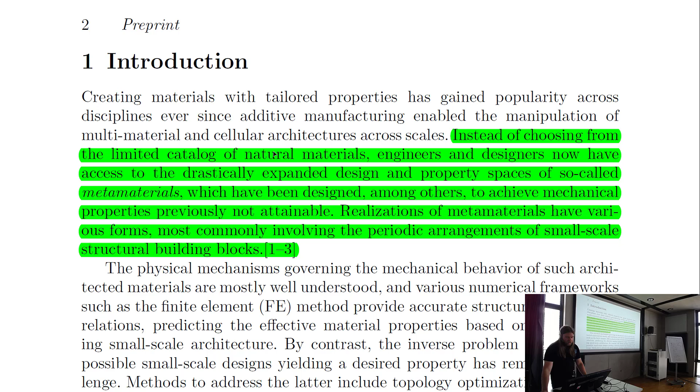So that's just some introduction to the metamaterials that Slava already kindly did. Let's go down and have a look at our data set, because from a machine learning perspective, the three important parts are dataset, model, and of course, evaluation.

So, here's what they did to generate the data set: they sampled some probability distribution, a so-called two-dimensional Gaussian random field. It's not important what that is—the important part is it gives us quite nice distributions in two dimensions that are connected and very well fit together.

So we don't need to worry about a piece of material that's maybe, if we have some peak here, then it wouldn't be connected and that would just fall out or break off. So then we take this field and do just some binary thresholding—you can see how this evolves. And then that's where our material is deposited.

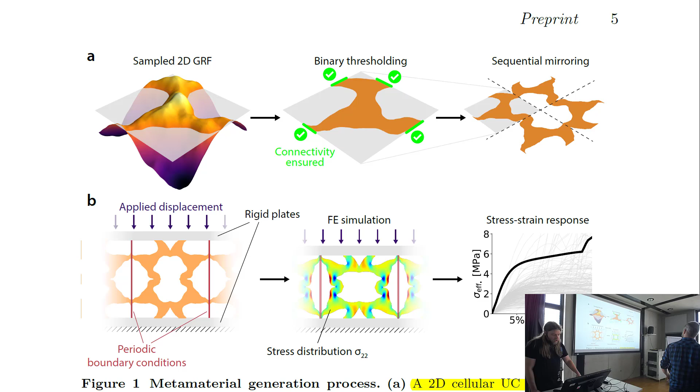These are connected to each of the sides, and from that we can actually do some mirroring to get some very nice pattern here. And that's how they generated the samples for the data set.

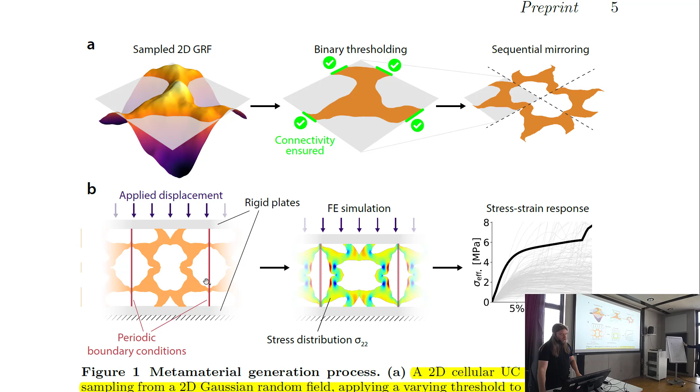And then they took them and just applied compression here, not on one element but on an infinite row of elements by supposing this periodic boundary condition, which means these repeat periodically infinitely. And for that, they did finite element simulations, and from that they got these nice stress-strain responses from which they got the 11 points.

And also these are the images I talked about—red means high stress, blue means low stress, and yellow is in between. Do you understand how it was generated? Technically speaking, you can choose whatever method of generation you want, really, but in this case, this particular trick—doing some three-dimensional thing and cutting it—due to properties of the distribution, you automatically have this periodicity, meaning you can stitch some of the elements together.

You can, for instance, stitch this one to this one and this one to this one. So it's kind of cool to have. And they copy it 4 times for one specific reason.

In mechanics, if you have this nice periodicity, it's much easier to define Young's modulus as one parameter. Because if you attended the class of micromechanics, you probably know that if you have arbitrary material, it can be anisotropic, so you need multiple parameters, like a stiffness tensor, to define properties in all directions. In this case, when you do the trick, you see it's symmetrical, so it cannot do shearing deformation anymore. This one cannot move here, and this one cannot move there, because everything is symmetrical. So this is just a purely mechanical trick.

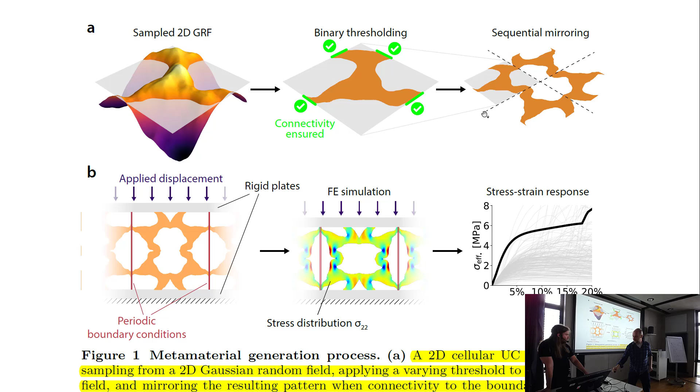Okay, go ahead. Yes. Thanks. Okay, yeah.

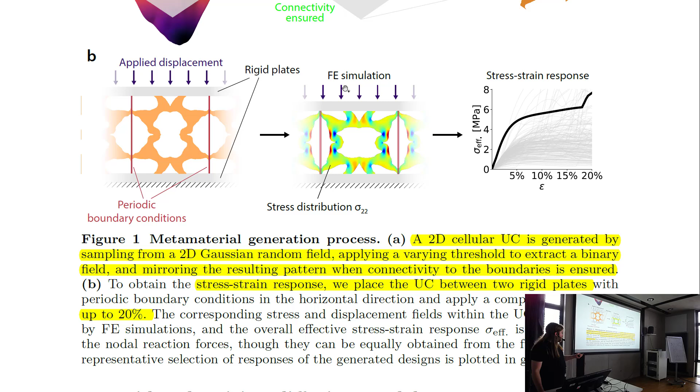Maximum strain you can see here is up to 20%. And that's our data. So we have these structures as input, which we can parameterize, and then we have our labels from the finite element simulation, both the stress fields and our stress-strain response.

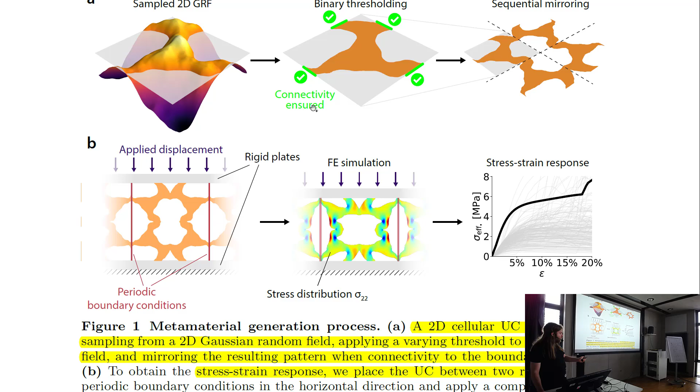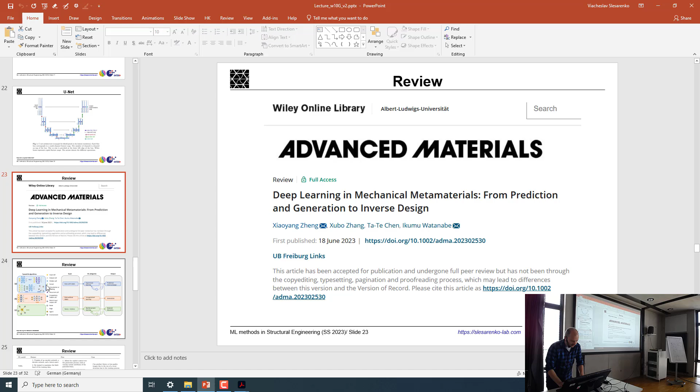I looked at different papers and came up with a very recent review, first published less than a month ago. This is an extremely massive review, still not published completely - the article has been accepted for publication but isn't yet published in the version of record. What you see here is a very good review of the different models that can be used in mechanics.

Have you any idea what GNN is? This one? Graph neural network. It's quite a cool model.

Instead of looking at neighbors in pixels like with images, you can look at neighbors along a specific graph path. When you have things that are related somehow, you can create a graph that describes these connections, and then use it to learn. But we will not do that here.

For this particular architecture, you usually have data with labels, so it's supervised learning. You use these labels to do supervision, and you can predict properties, or if you tweak it a little, do inverse design. For instance, what we did with Gerrit, using a tandem neural network, similar to an autoencoder.

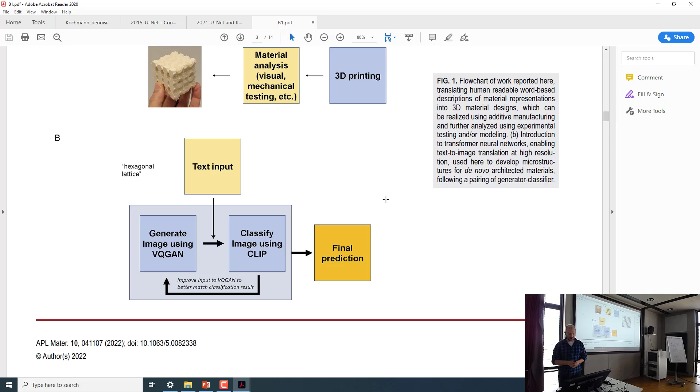It's just hype. They used a very interesting architecture - they have a GAN that generates images, and they also have this CLIP model that tries to understand how close the generated image is to the text. So you generate an image with this VQ-GAN, then ask the CLIP model to describe the image, and compare how close your original text input is to the generation, doing it in a loop until you get a final prediction. But what they have as a final prediction is quite, again, ridiculous in my opinion. Then they transform it into 3D printable structures and 3D print them. Nice, very nice - but I have absolutely no idea why anyone would like to use it.

So fancy things - I think it's too early to talk about transformers in these particular domains. But what is actually good to talk about is this: pragmatic generative optimization of novel structural lattice metamaterials with machine learning. I would like to do this one together with you. I will open it, but I will not show you anything on the paper itself for now - this is a different paper.

And I would like to give you a challenge. Are you familiar with 3D printing? A little bit. At least you saw 3D printers.

So the thing is, my task right now, I would like to generate some geometries, some metamaterials that will have high Young's modulus, so they will be stiff. But at the same time, there's another parameter related to Young's modulus called wave velocity. We would like to minimize wave velocity because it will make our material much better in case of impact, so it will accommodate more energy. So high E, and low, let's say, C.